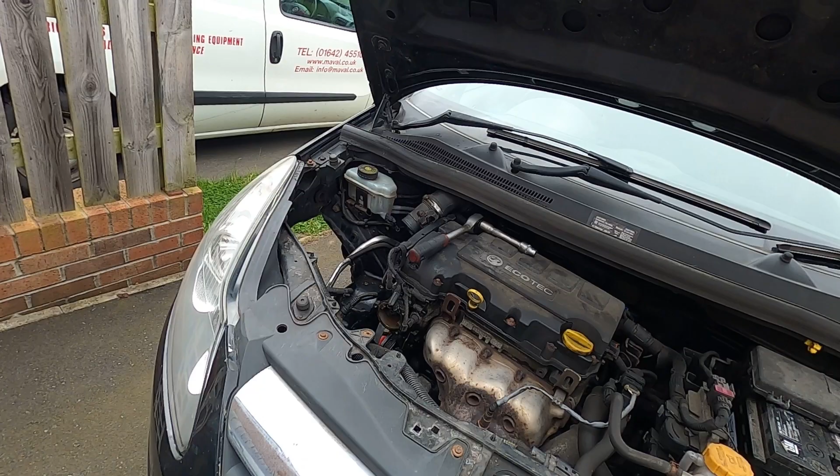Well, we're on to the next day because I needed to wait and get the correct pump. I had the wrong pump. Here's the correct one. You can see on this one, I'll get it out in a second, but so the Corsa D 1.2, you can see it's a fairly simple one. It doesn't have extra ports, that kind of thing.

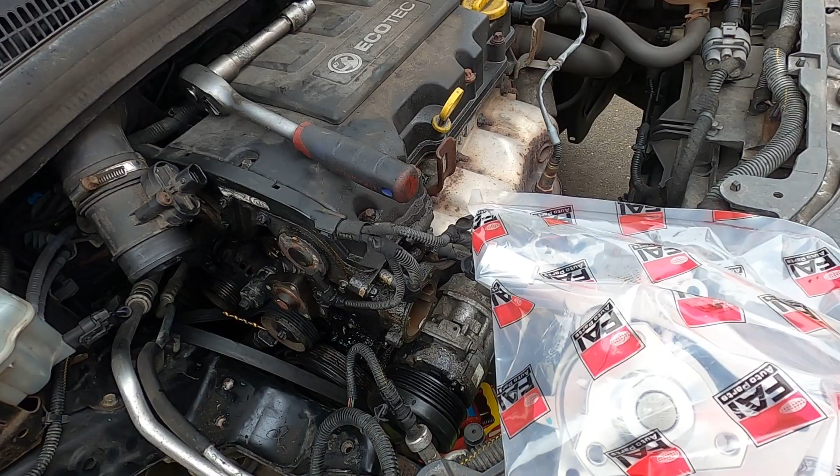Now, having the new one has been a help because I've been able to look and check that I've got all of the bolts undone, because there are a lot of bolts to get at in there, and make sure that they're all undone.

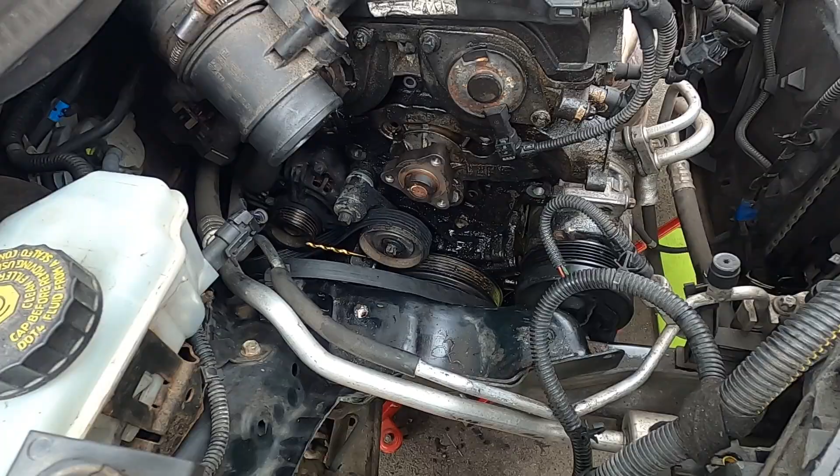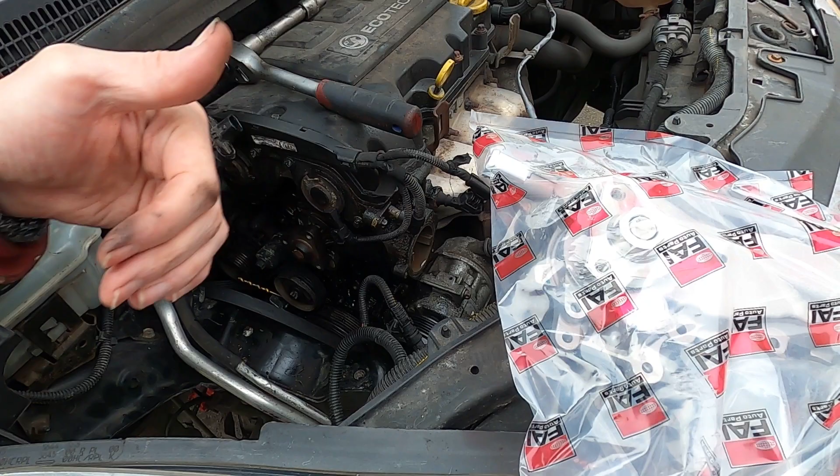They're all undone now. I've also taken the front pipe off, which houses the thermostat. So there it is, just there. And what I also found is where I had the engine jacked up, I was jacking it from the side, and what was happening is the engine was actually getting pushed that way, which didn't help getting access

and getting that annoying bracket out of the way, which I've managed to get out of the way, and that's made access so much easier. So when you do jack it up, try to jack it up so it pushes that way a little bit, and when it lifts it gives you much better access.

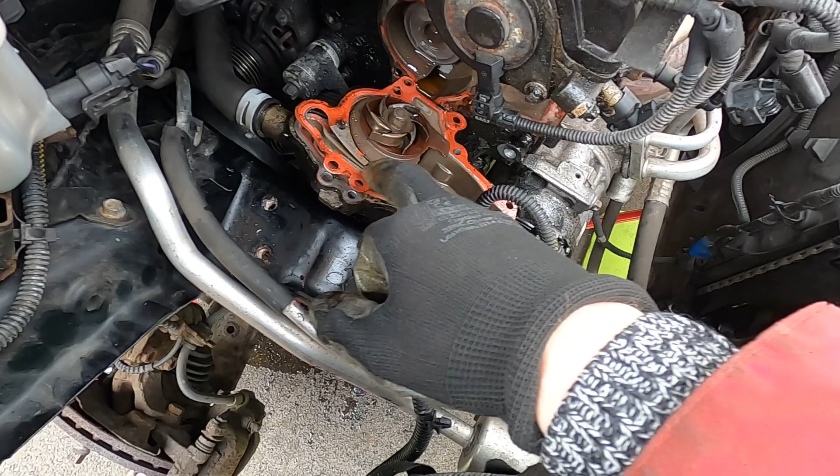So we now need to get the pump off. Now I think probably a rubber mallet might be needed to give it a bit of a tap and just get it free. I'm going to do that now. Here we go, a couple of taps with the rubber mallet and it's come off. Now you can see there's quite a lot of gasket sealant. I'm not sure if that's factory, I don't think that would be.

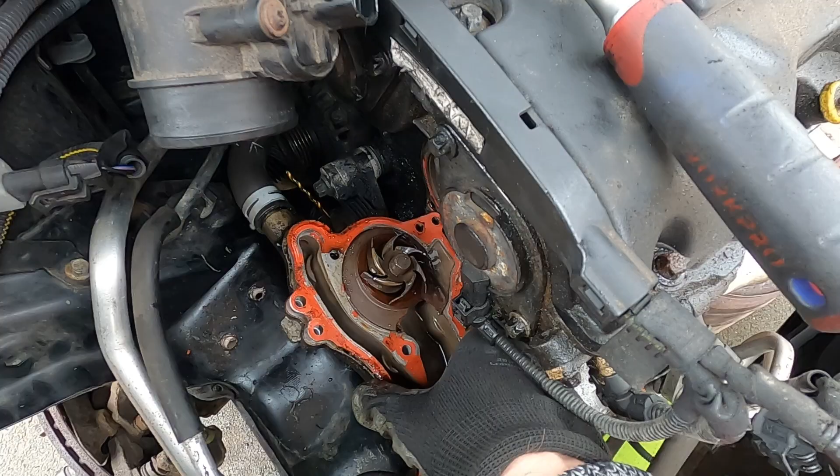But also if we take a look at the pump, yeah, that's in quite a bad way. Actually, what I want to know is where that chunk of metal's gone. But this does kind of prove that we did need to change this. I am quite concerned where that piece of metal's gone. I'm hoping I can spot it. I can't see how it could have actually gone any further into the coolant system.

But I think now what we need to do is clean up this surface, so I use like a Brillo pad, get this surface all cleaned up, get the pipe disconnected. Let's get this pump out. So there's the pump out. Taking the pipe off, that pipe was quite well held on. I'm going to clean that up with a scouring pad now, just to get that nice and clean.

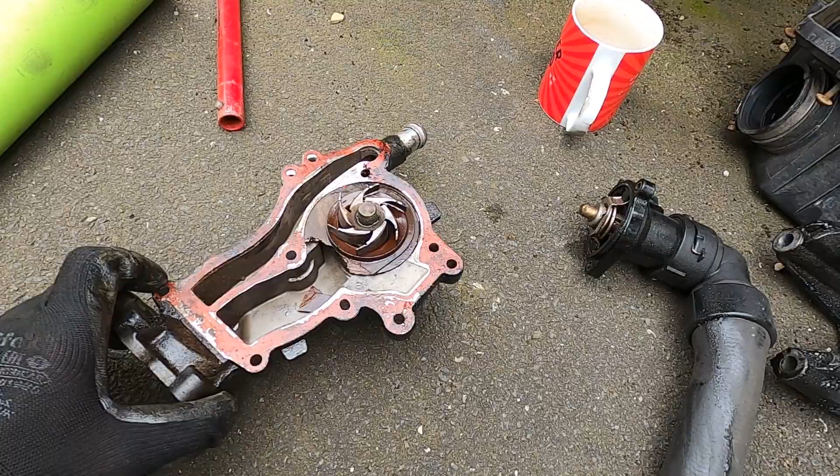I'll just show you the pump that we've taken off here. Put it the right way up, and you can see it's kind of a cardboard component. That bit has disappeared, so that's given up completely. You can see actually I can very easily break it, so I think that's just broken down over time,

and that's what's happened. But that would explain why we had a coolant problem, and it's why you should catch it early. If you have any sort of coolant warning, you must get it looked at straight away. So I'm going to clean it up and let's get the new one ready.

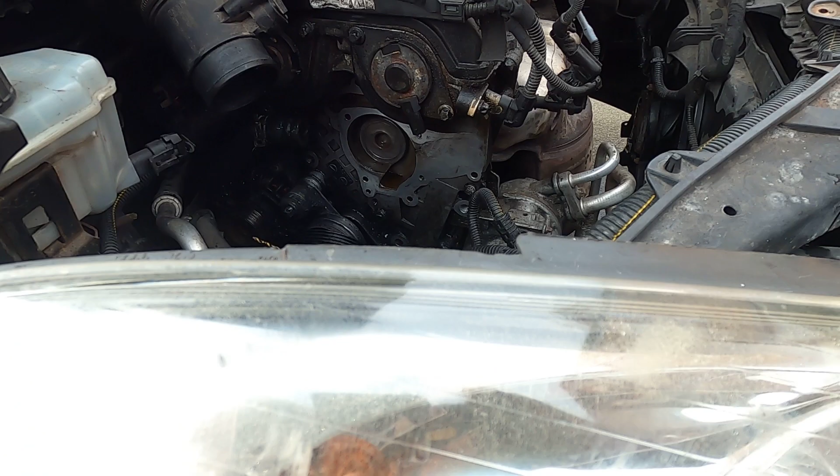Giving it a good clean, you can see I've just cleaned it up so that the surfaces will mate nicely. I'll take you in for a closer look just so you can see what it looks like. That's cleaned up as good as I can. I didn't have a degreaser to try and get rid of some of the oil. I have also flushed a bit of water through the system as well, just to try and give it a bit of a clear out, ready for the new pump to go on.

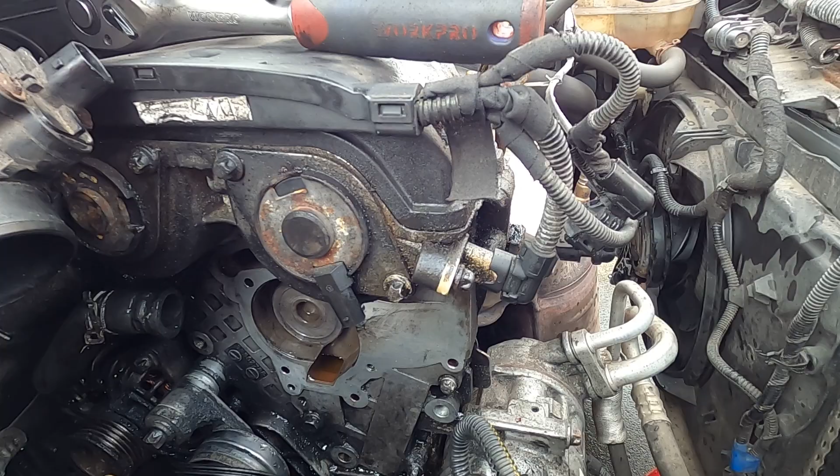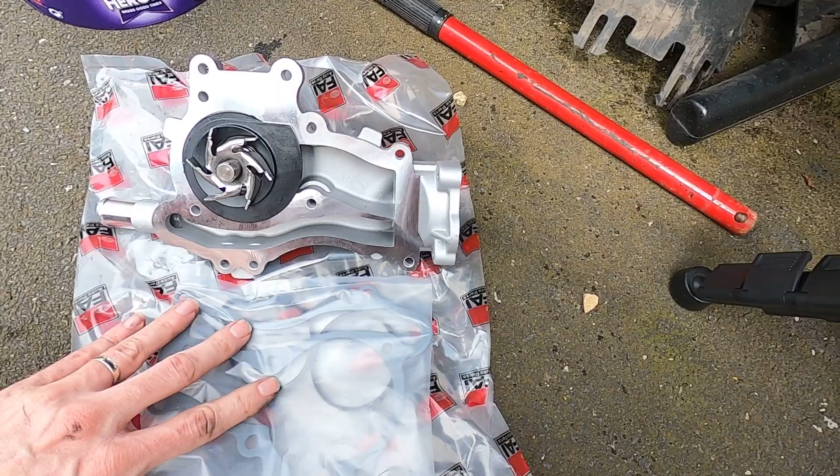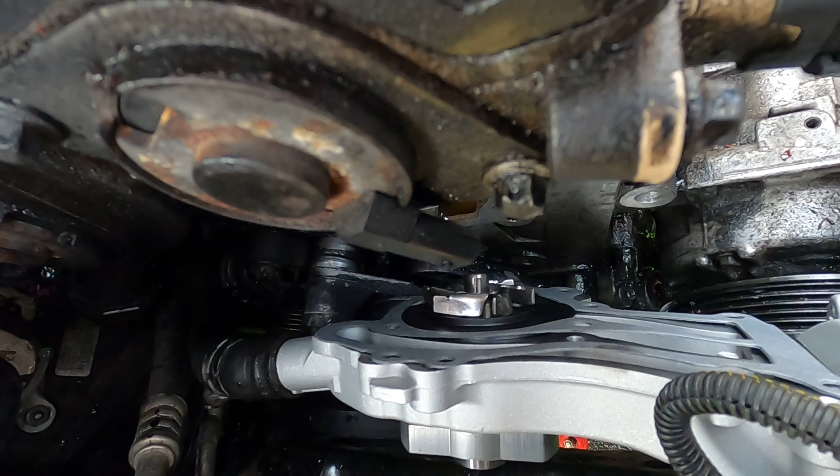And I think it's about time we got the new pump on with the gasket and get it all in place. The gasket's on. See, I've put the pipe on. I need to put the pipe clip on, and I've put all the bolts in, remembering which ones were long and which ones were short.

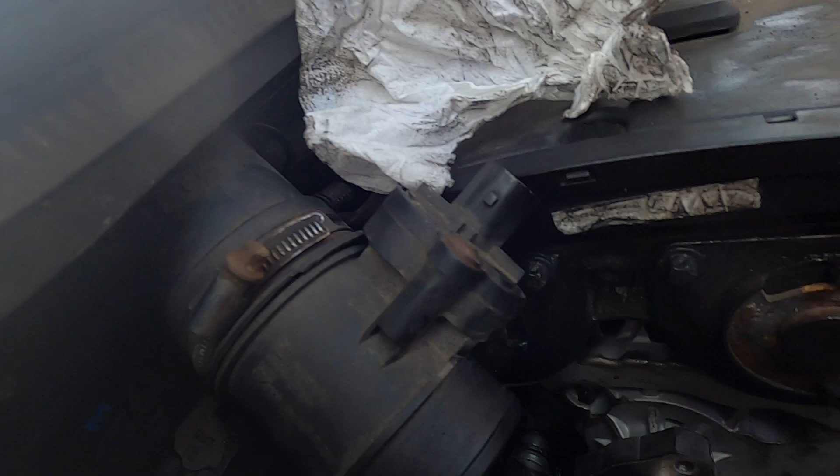I did make a note which are long and which are short, because there are two different long bolts and one set of small bolts that go around it, and trying to get those correct, because it depends on which ones go all the way through to the timing cover and which ones hold the pump in place.

And I've got all of those in place. Now I'm just going to look at the torque spec for this. They weren't mega tight when I came to undo them, so I don't think they've got super strong torque. It is worth just checking to make sure you're not going to over torque them, because although we want it to be watertight, we don't want to over tighten and cause damage. I'm going to have a look at the torque spec now.

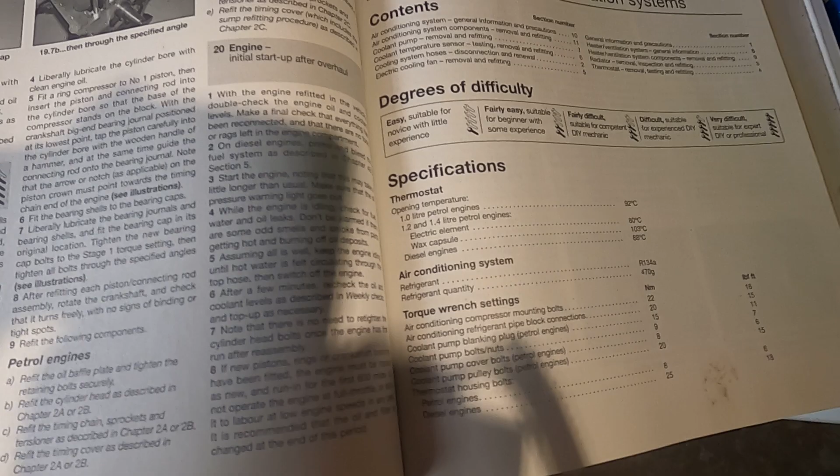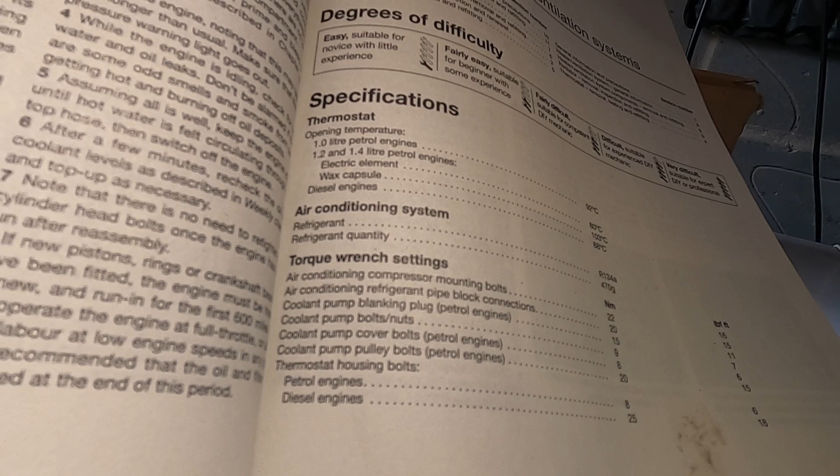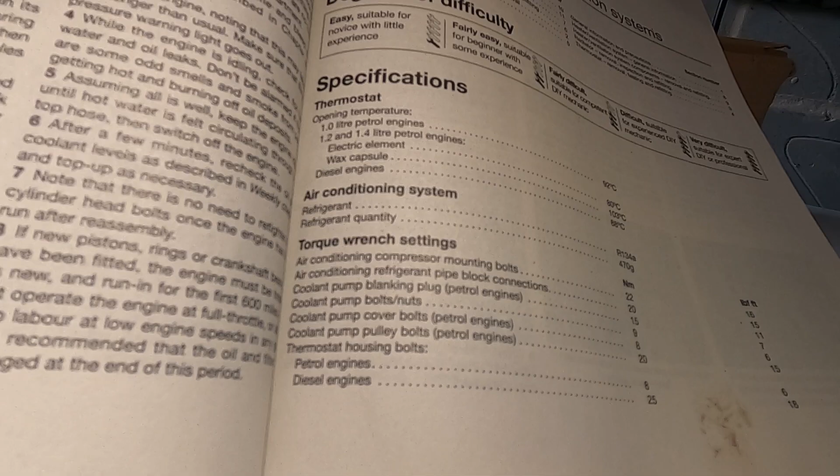Here we go. Torque settings. Coolant pump, bolts and nuts, 9 newton meters of torque. That's 7 pound-foot, so that's not a lot. To give you an idea, my torque wrench doesn't go to 8, it's 28.

So what we're going to do is we're just going to do a little hand tighten on them, and that should cover us. Thought I'd give you an update as I'm putting it all back together. You can see the belt's back on again. Just getting the order of things right, putting the engine mounting bracket back in place, not bolted on, then putting the pulley on, then the belt, just so it's all in order and all in place. Those are tightened up as well.

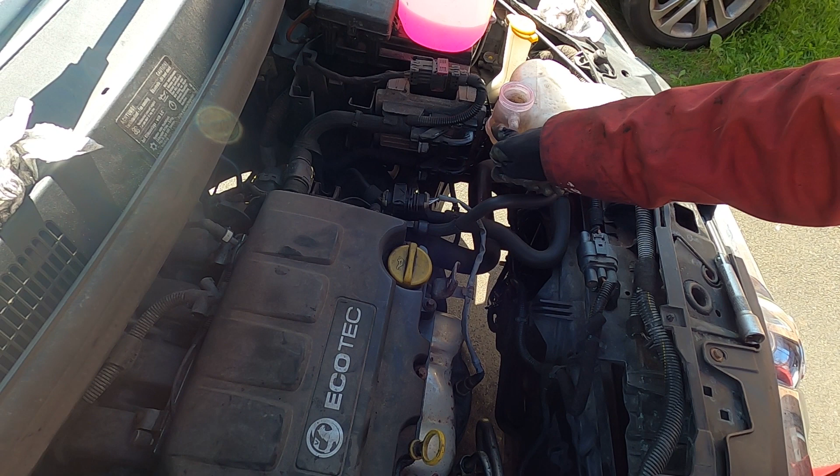I'm filling the coolant system back up again. Now what I'm doing is I'm filling the expansion bottle up quite near the top, and then this hose here is quite a good hose to squeeze and pump, and what you'll find is your coolant level will then start to go down out of the expansion tank.

This is the second fill I've done, not a full bottle, and now you see the coolant is up above the line. But if I now pump this, you can hear there's air in this pipe, and as I do that, and actually what you can sometimes do is just let go, and what it'll start to do is it'll start to siphon its way around.

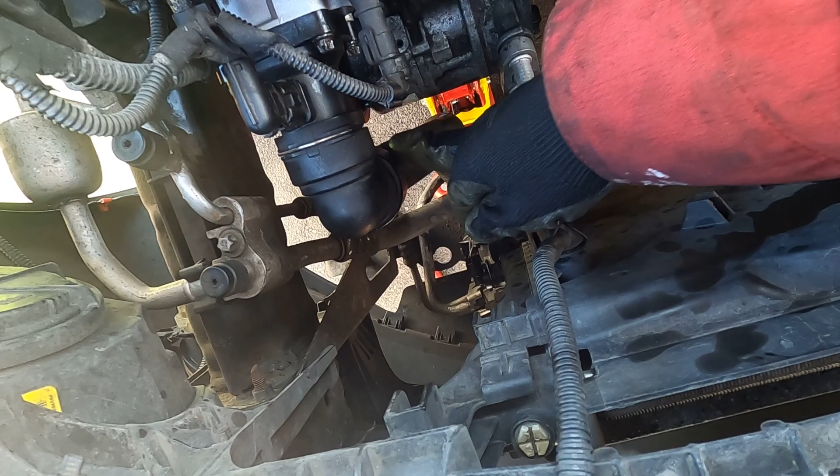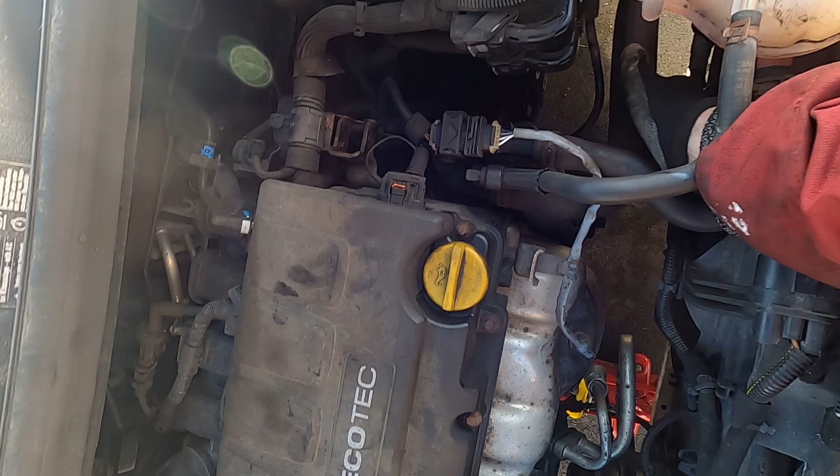You can also pump up the pipe down here as well, which is from the bottom of the radiator leading up to the thermostat, but because that's uphill, you're not going to get an awful lot coming through that way. It's not too bad an engine to bleed. I've done this a few times in the past, and it does bleed itself quite well, but you can see the level's gone down again. If I pump it again, because I can feel that this pipe has emptied once again.

And a few minutes like this, just helping, rather than just running the pump and trying to prime the system, it does make it easier. Well, now I've done that, I think it's about 4 or 5 times, and now the pipe is staying hard. You can't hear too many air bubbles, there are a few, and the level is staying about midway, and I can hear fluid starting to go around the system.

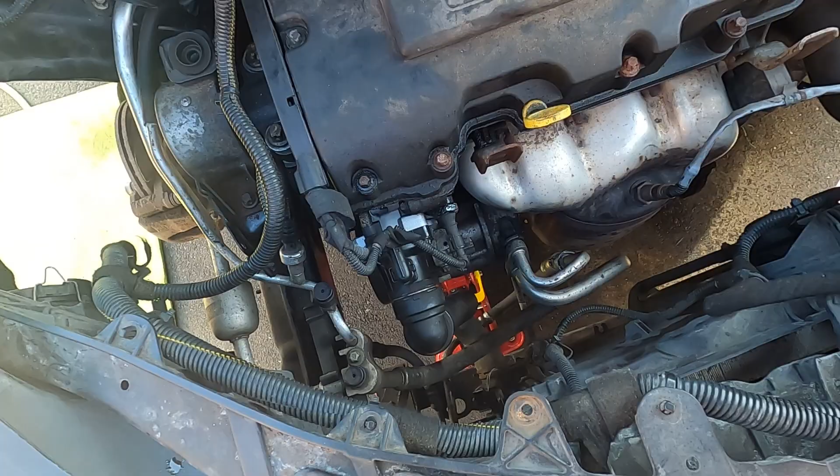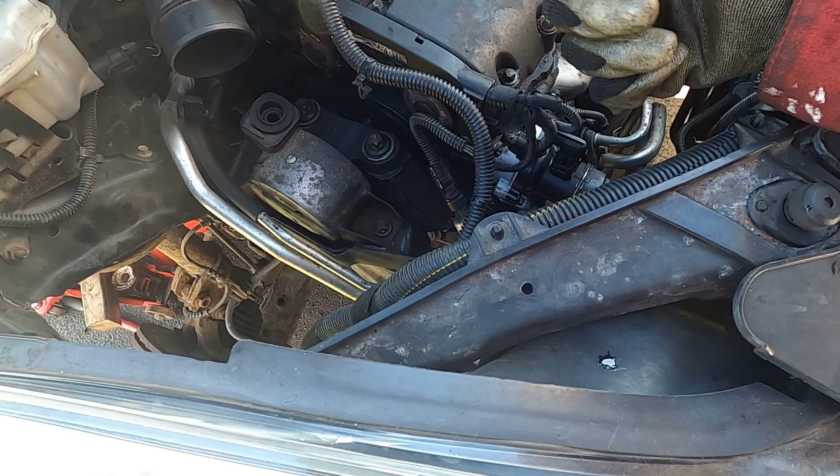So I'm going to check for leaks, see if I can see any drips or any water coming out from anywhere around where I've done the work just before. And then we're going to make sure that everything's clear. What I've done is I've hand turned the crank just to make sure that the belts and pulleys are all moving freely and working correctly.

And then what we're going to do is we're going to start the engine up. I've reconnected all the sensors. Start the engine up and just let it idle just to get a little bit of water through the system, turn it off and just check for leaks again before we run it up to temperature.

So what I've done is I've had the engine running a few minutes. I've cleared the previous fault, because it did store the previous fault code and it turned the cooling fan on immediately, but I think that's just the previous code. The light's gone out now and the cooling fan is turned off.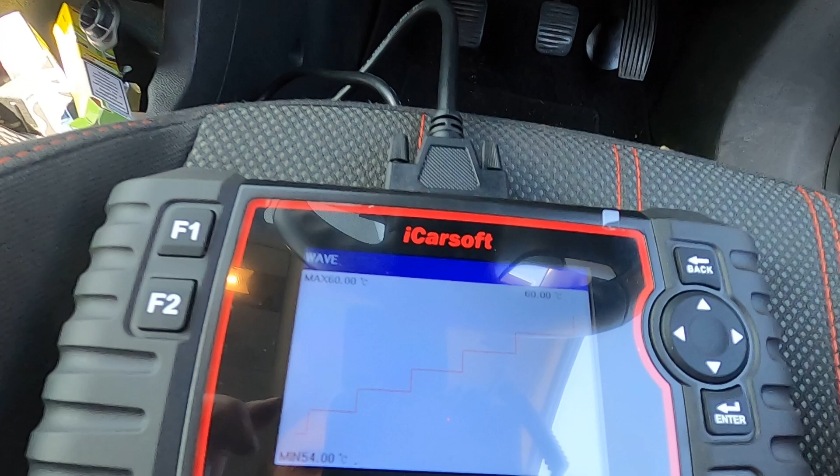Now I'm watching it on my diagnostics here to see what the... It's difficult to get you a view of what's going on. Let me see if I can get you a view here.

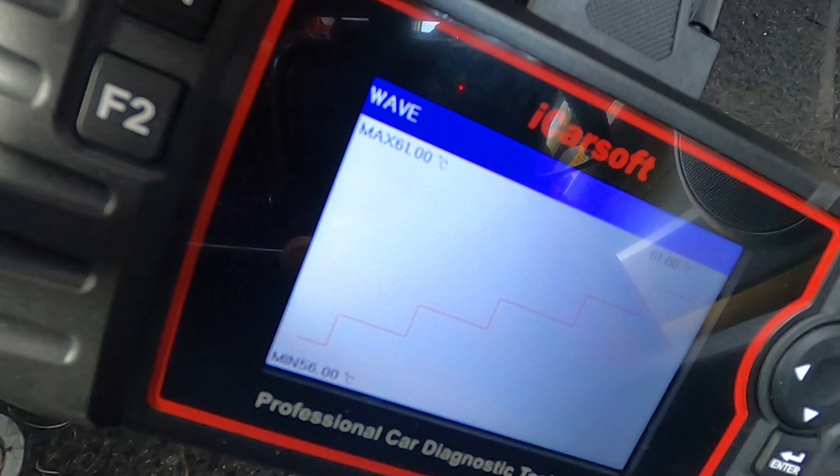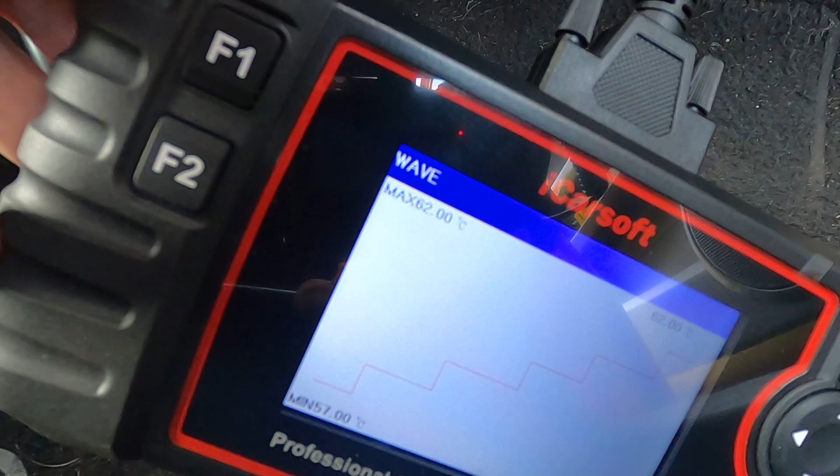Showing the temperature, we're at 61 degrees. Now I know that the thermostat on this is quite high. I think it's around about 100 degrees, 90 to 100 I think, before the thermostat fully opens on these. So I'm just going to watch and let the temperature climb up and keep an eye in case we have any fault lights or any warnings come up. But so far it's running quite nicely.

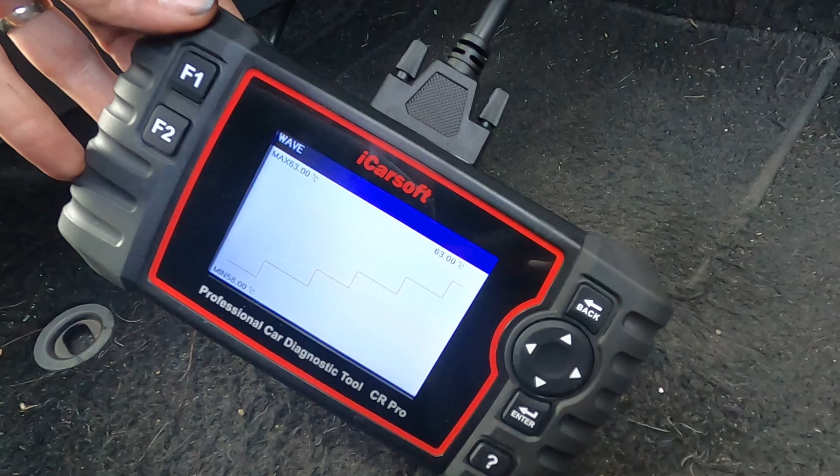Now also, if I turn the temperature to hot in the car and turn the fan on here, I'm getting nice hot air coming out, which is a good sign, because that shows that the hot coolant is circulating the system. Now I'm going to turn that back off because I do want the temperature of the car to go up, because I want to check that the thermostat will open and that it's bled fully.

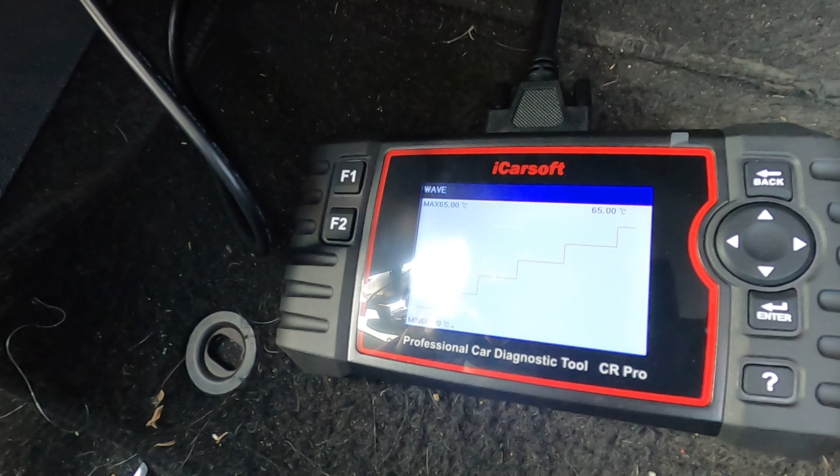So that's going to take a little bit of time. I'm going to let it warm up. So far as well, checking underneath, we can't see any leaks or problems or anything, which is great news.

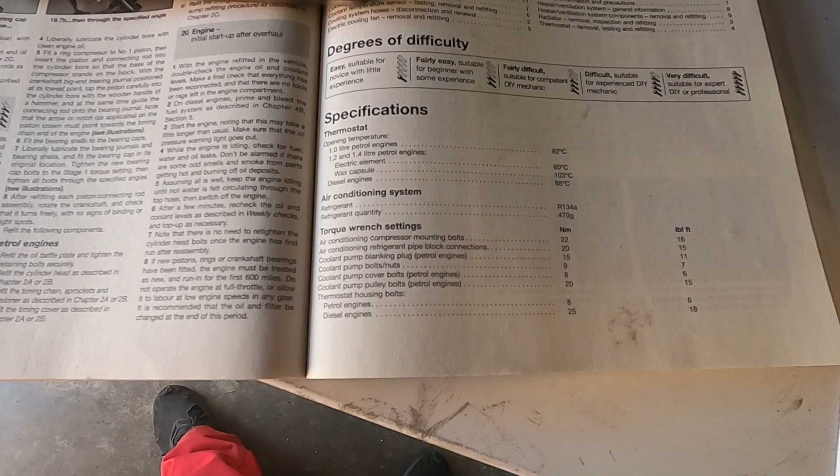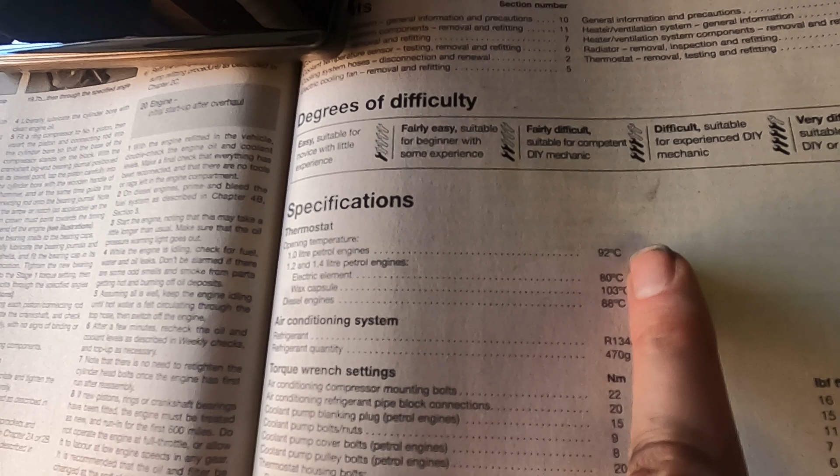If you're like me and you're doing this job and you think that the engine is taking forever and you're thinking the temperature is climbing, looking at this, so this is the 1.2 petrol and it's the wax capsule. If we go along, you can see the temperature is 103. That's the thermostat opening temperature, which is quite high. Obviously if you've got one of the different engines, there's the other temperatures there. So 103 is what we're looking for.

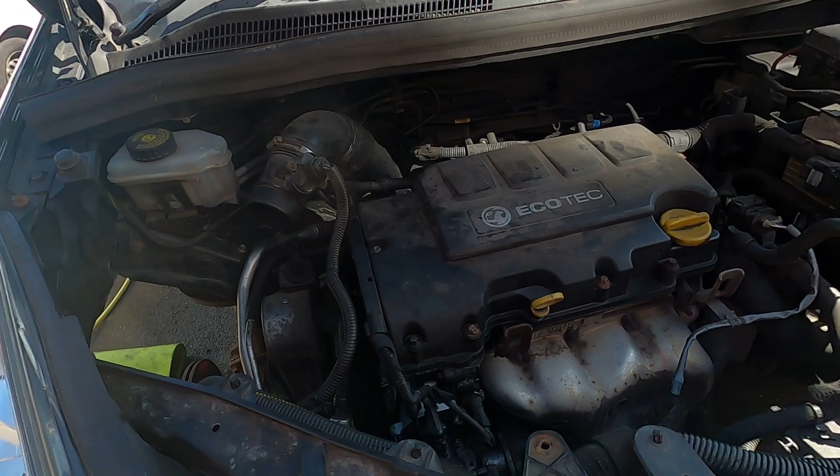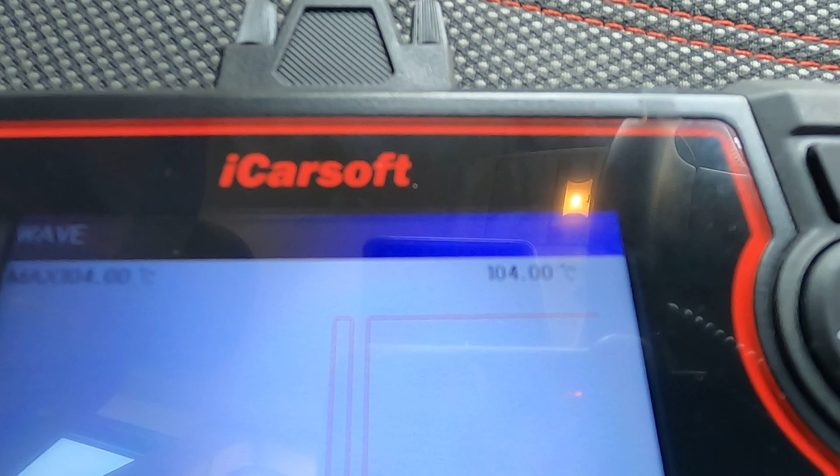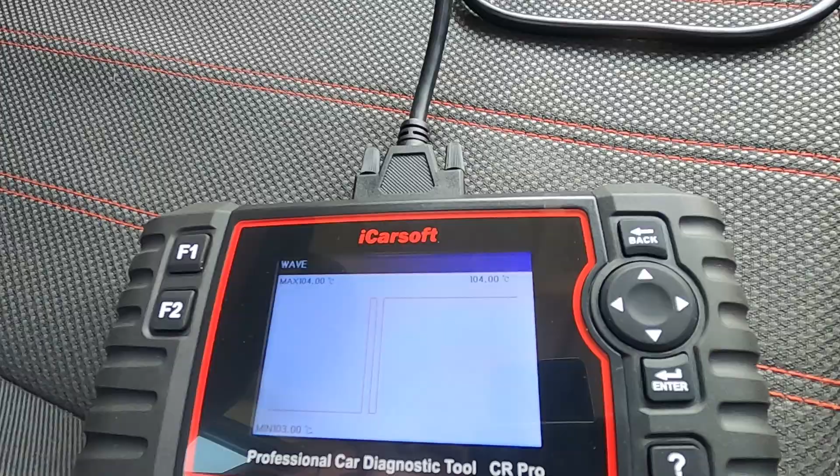Let's go and have a look. Cooling fan hasn't come on yet. No fault lights, everything looks good under there. I've put the cap back on because the temperature's getting high and I want the system pressurized. Let's just have a look. Oh, we've just gone 103, 104, you can see on the diagnostics. So that thermostat should be opening somewhere about now. Now, give or take a little bit because it is a wax pellet one.

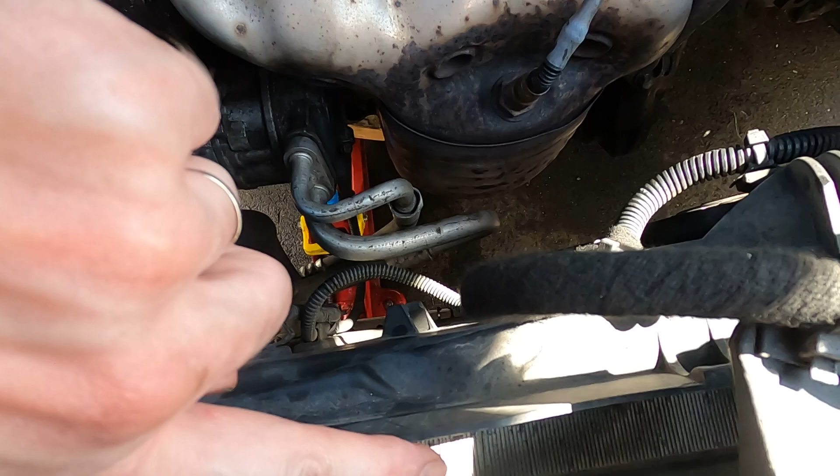What I'm going to do, I'm just going to see whether this pipe here, yeah, that pipe there's still cold, so I don't think it's starting to flow through yet. I think give it another few minutes and it should start to feel that warm up. That's just the top of the radiator, hasn't warmed up yet, so I don't think it's fully flowing through the radiator yet. We're just about at the wax temperature for the thermostat to open, so I'll give it another few minutes and check again.

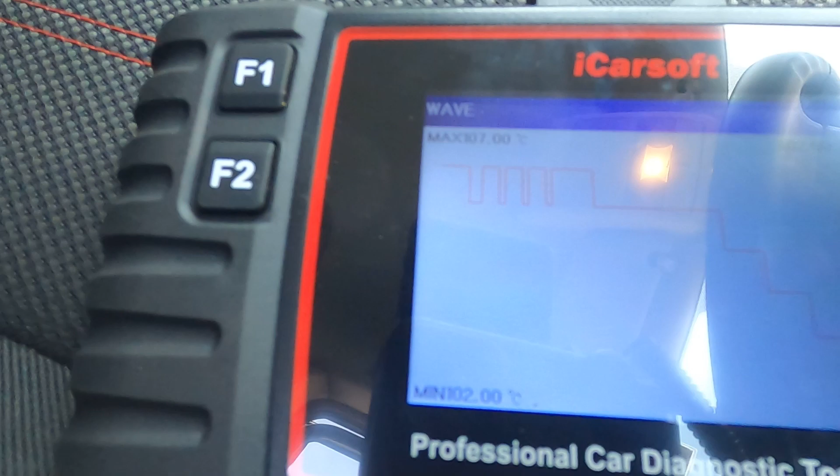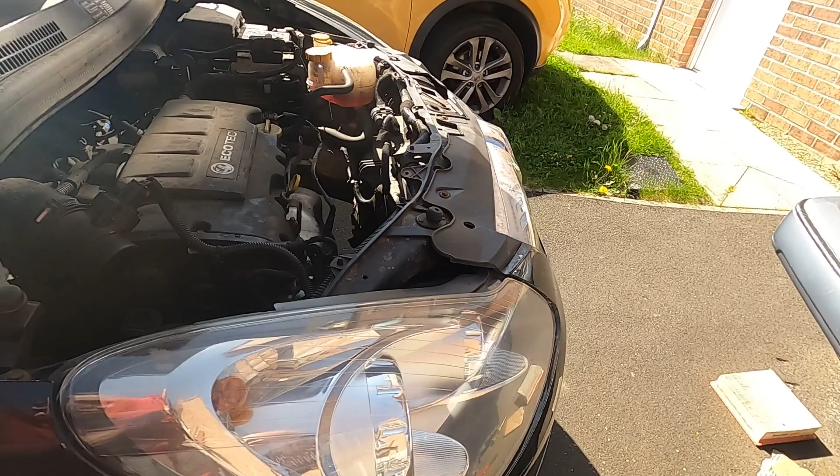Just quickly catch it here. You can see the max there is at 107 and you can see the temperature is now falling quite rapidly. And that suggests the thermostat is now opened. Now if I carefully touch the little bit of exposed radiator here, yep, that's starting to get warm. And this pipe here, yep, that's starting to get warm. So that looks like it's now starting to flow through the thermostat quite nicely.

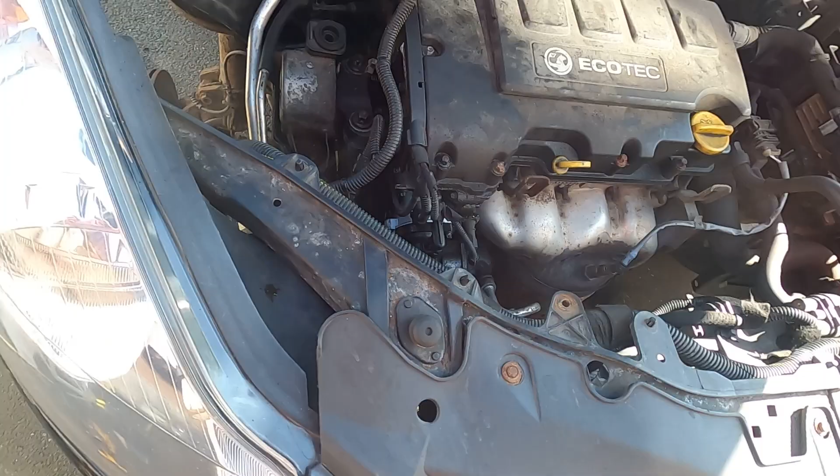I'm going to keep it running a bit longer because I do want to make sure that it runs through this system fully. Make sure we don't have any leaks. Gets the system nicely up to temperature. Probably wait until the cooling fan kicks in as well to make sure that if it does keep going too high, actually it's not going to go too high, is it? We can see it's successfully dropping the temperature.

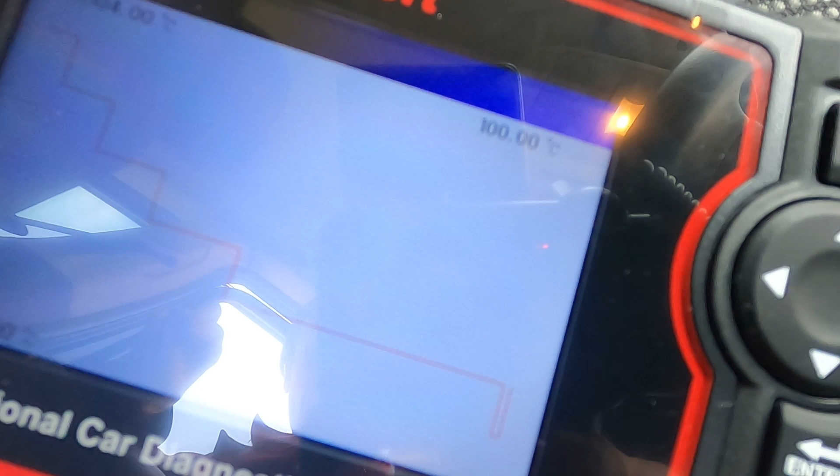We're down to 100, 99. That is dropping the temperature really nicely. That is looking good. I'll let it run a little bit longer, turn it off, and then take a look for leaks, being careful that it's all going to be incredibly hot.

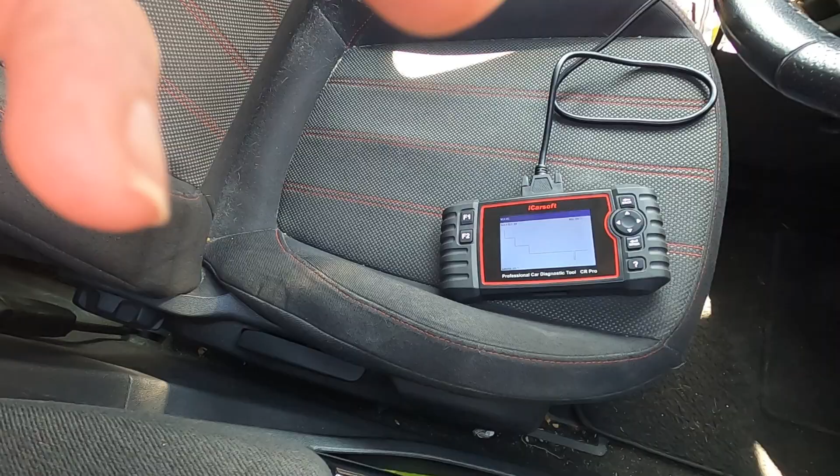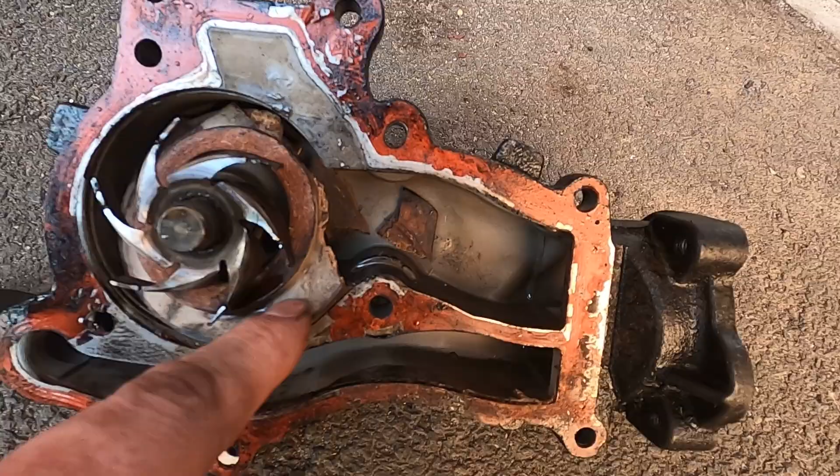And I think that's where I'm going to leave this video now. You saw the process of changing the water pump and the thermostat on our 1.2 petrol Corsa. Good news, that has solved it. The old pump, it's actually just down here. You can see it's in a bad state. This is all disintegrating. So it's obvious that that was our problem, which is great news.

It's always good news when you get through something and find a fault that you knew you were going to find. But it does give you a bit of encouragement when it actually shows up as obvious as that. So that's our Vauxhall Corsa going back on the road very, very shortly. My daughter will be pleased because she's been lost without her car.